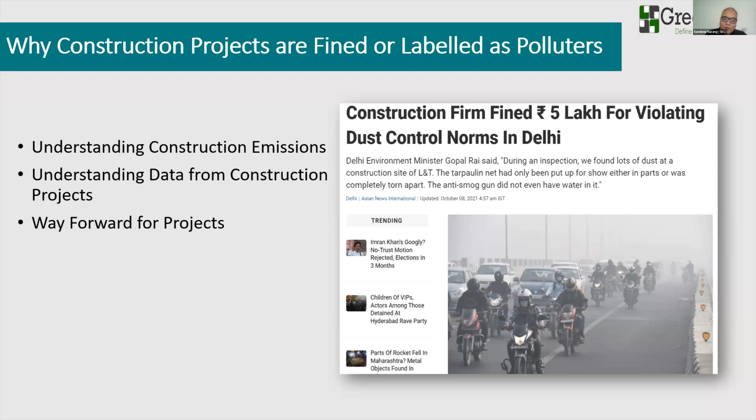Now the problem lies in understanding of construction emissions. As National Clean Air Program came, air quality index was formulated for 131 non-attainment cities. Now AQI has these 6 parameters: PM 2.5, PM 10, particulate matter, carbon monoxide, sulfur dioxide, SOx, NOx, and ground level ozone. Whereas the majority of the people, I have been training lots and lots of construction companies and engineers who are working in this field, they think that the dust cloud that comes out of the construction projects, that's the problem.

Whereas the air quality index is affected by PM 2.5, PM 10. And we all know what PM here is. So imagine the particulate matter being tracked by urban local bodies or pollution control board is very small, which is invisible. So this clears the doubt that the dust cloud which we see around the construction projects is the higher particulate matter, which will settle very soon.

Nobody has died of sandstorms. We have been living in India, and North India is famous for sandstorms. Has anyone heard that there was a sandstorm and 100 people died? But the particulate matter of the smaller size has been affecting human health. So there is the interface of air quality and the smaller particulate matter.

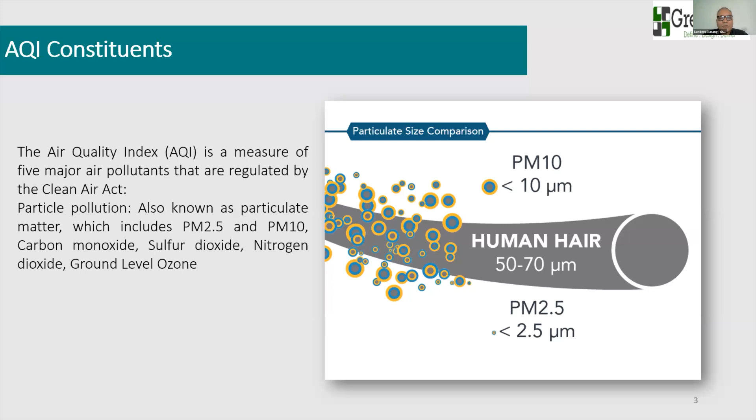This has to be made clear, because wherever we go, whenever construction companies are involved, they talk about, no, it's the dust cloud we see, you are creating lots of dust. It's not. Emissions from construction projects which are at the interface of human health are PM 2.5, PM 10, SOx, NOx, and all the 6 parameters which have to be tracked.

And when they have to be tracked, monitoring for construction emissions is mandatory. People don't monitor the construction projects. That's one of the problem areas. Even construction companies don't understand why we need to monitor, why the air quality monitors have to be there. Because once you put the air quality monitor, then only you will be able to understand that PM 2.5, PM 10 or emissions are coming out of the project, and they have to be tracked. In the field of sustainability, we always say what is not measured is not managed. To manage a problem, you have to measure that problem. So monitoring for construction emissions is a must.

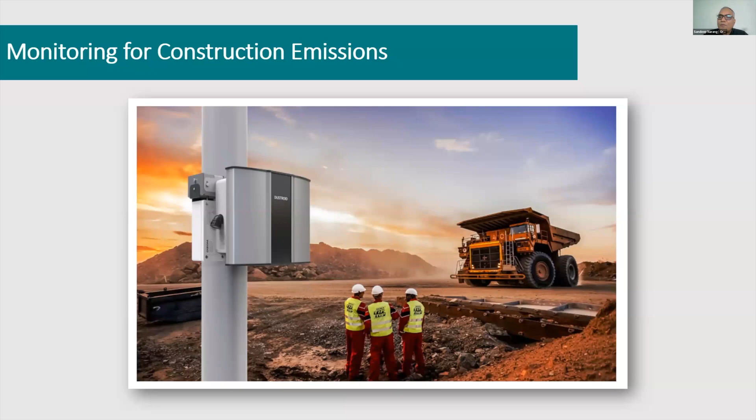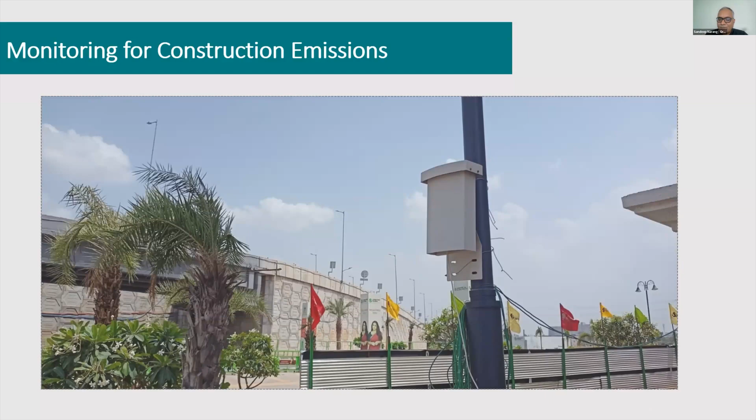And when we go to the project sites, what we see is the air quality monitors, whatever they've installed, they keep inside some laboratories or other areas. We are monitoring for outdoor air quality. So they have to be installed, like I have shown in the picture, in the open, within the construction micro boundaries, within the project area, at 6 to 8 feet height. We install them at 8 feet height. So monitoring for construction emission is mandatory and has to happen.

There is no monitoring protocol. Look at any of the guidelines being created all over India. They say if you have a project size of 500 square meters, you have to monitor for air quality. But how many monitors? What to monitor? They have said, okay, you monitor for PM 2.5 and PM 10. Which monitors to be used? Low cost sensors. Now BMC is coming up with a list of monitors that you can use. But for the number of monitors, again, there is no guideline. So this is a gap.

I'm just talking about where the gap is today. Being on neutral ground, I'm neither at a construction company office talking to them, nor at a pollution control board or government office. I'm at a neutral ground, so I'm telling where the gaps are. Number of monitors: nobody has mentioned how many if it's a 500 square meter plot, and how many if you have to monitor a 50,000 square meter plot.

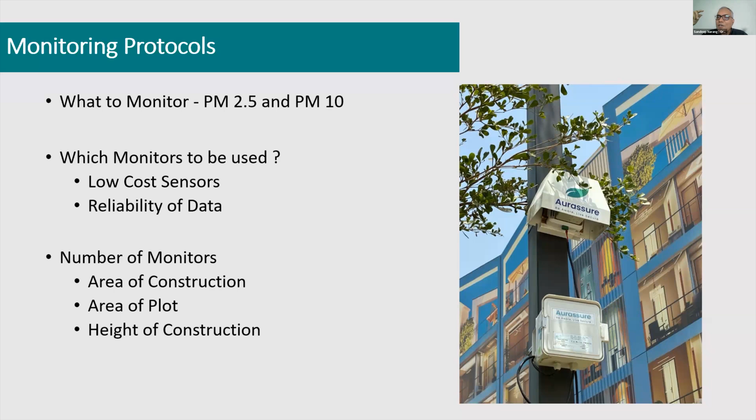But in case of bigger plots, how many monitors have to be there? Area of construction, area of plot. In Mumbai, what happens? Smaller plot, they construct vertically high. So should the number of monitors be going up or down? This is the gap. This gap has to be addressed.

And once we start monitoring, there comes the data at construction site. There are no guidelines from government on what to do with this data. So I'm showing you the dashboard of a few of the construction projects. Data is coming. As a civil engineer, as an engineer working at any of the projects, if there is data, this data should lead you to some actions or some ramifications. The data is not there as a movie to see, or an advertisement. Data is for some purpose.

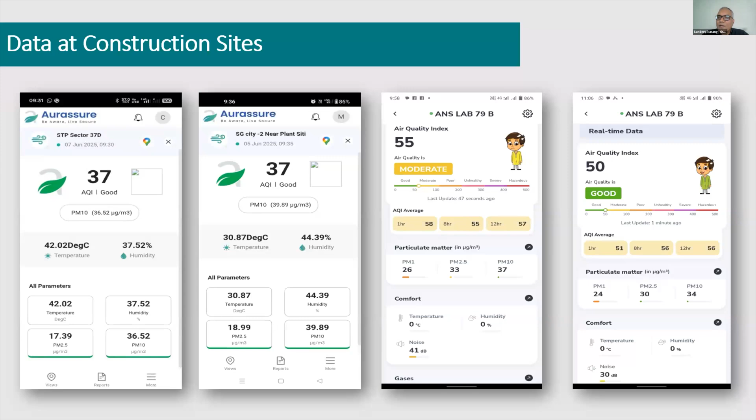Now this data is coming at a project site. What do we do with the data? So I am showing you the data of one of the projects in Gurgaon. What we did, we tried to study the delta between the point data of the project at 12 noon and 6 p.m. Why 12 noon and 6 p.m.? Because the construction project work starts at 9 a.m. and stops for lunch at 1. So activities peak around 12 noon. All the activities are happening and they are at the peak time.

Similarly, 2 p.m. to 8 p.m., again the activities are at peak around 6 p.m. All the activities are happening. So look at the data. There were 4 monitors at the site, and the site average was 35. And the nearest SAMEER app, that's the CPCB app, was showing 102. PM10, 40, 105. Everywhere, the PM2.5 data at the project site was lower, and delta is the difference between the project site data and the CPCB data. There's a big delta. What does it imply?

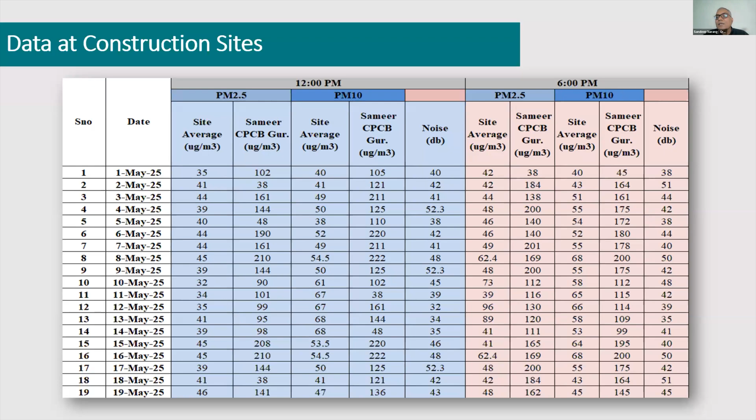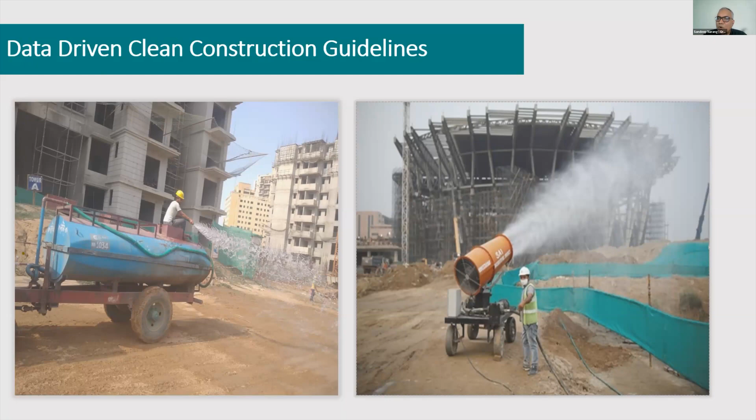Nobody is looking at this data. This is the irony of the work we are doing. But what can be done with this data, I will try to tell you. There should be data-driven clean construction guidelines. We are looking at net zero carbon construction, net zero carbon India 2070. We can't waste water just for the sake of it. So if data shows that there is a need for water sprinkling or running smog guns, they should be run. If no work is happening, it's the 2nd of October, stop all this. Don't waste energy, don't waste water if there is no data showing spikes from construction.

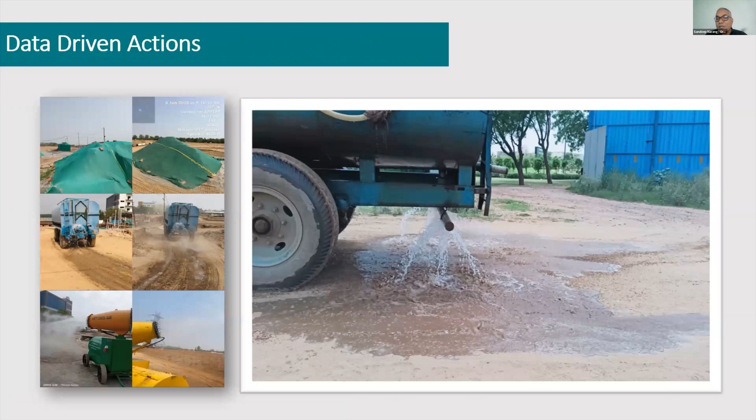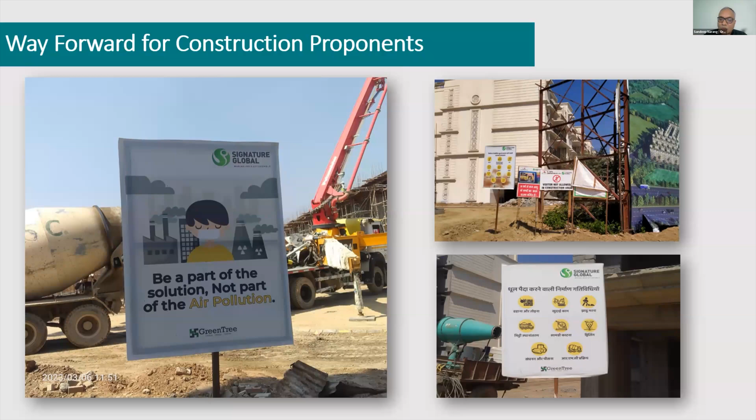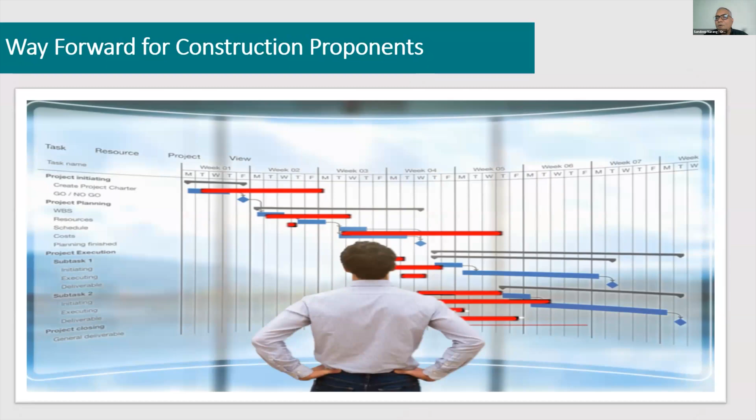This is one of the important points I wanted to address, how data should be used. And what's the way forward for the construction proponents? If you go to construction projects, you will see lots of signages for the safety of the project. Wear helmets, wear safety jackets, don't touch naked wires, but there are no signages regarding clean air, clean air construction. So there should be lots of signages at the project. Again, a construction project runs for say 3 to 4 years, so the company should prepare a schedule. They know what activities will happen, whether they will produce emissions or not. So they should be ready, forecasting activities.

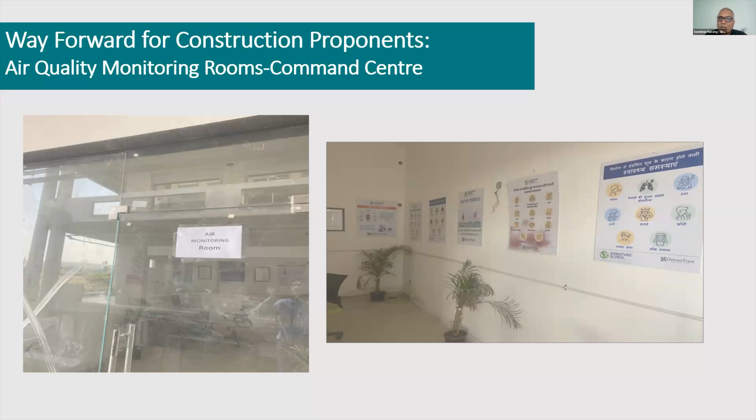And how can that happen? As there is a quality room at a project site, the same quality room can have a smaller area designated as an air quality monitoring room, where the discussions around clean construction happen, where the data is studied. And this is how we take it forward. So this is my last slide. I am showing you yesterday's slide of Delhi. Delhi has 40-odd CAAQMS stations of CPCB, and Delhi's air quality index yesterday was above 200. GRAP 1 has been enforced.

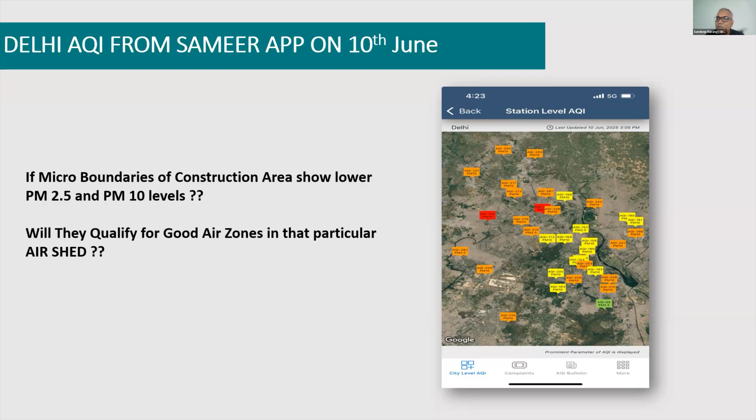Now look at the Delhi timeline. Within the airshed of Delhi, there is a place where AQI is 66, and another where AQI is 381. Now, micro boundaries of a construction area, if clean construction can happen, and if there's reliable data showing that PM2.5 and PM10 levels within those micro boundaries are lower than the total airshed averages, shouldn't the construction areas qualify as good air zones in that particular airshed? That's my question. I leave it to all the attendees and whoever is connected with the subject. I am open for more discussions.